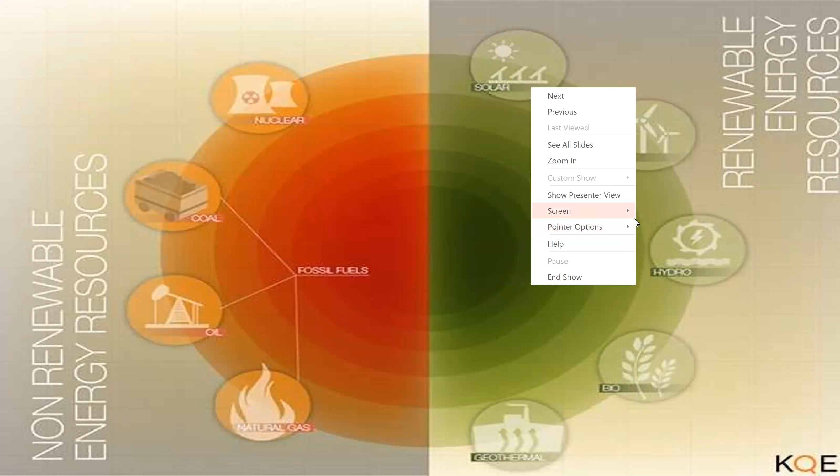We have hydropower, energy generated out of water. We have geothermal, energy generated from the heat available under the land. Or we have biomass, energy generated out of animal manure or rotten crops, etc. These resources are going to be available forever and are not going to end at any point—they are called renewable resources.

So this is a definition available for both; this is a primary definition. All those resources available in unlimited quantity, that is, they will not run out, are known as renewable—they may include water, sunlight, air, etc. All those resources which are limited and continuous usage will end them are known as non-renewable—they may include coal, oil, gas, nuclear power, etc.

Here in this chapter of your book, we are going to study about both resources—that is, how energy is generated out of the renewable resources, and also how energy is generated out of the non-renewable resources. So first of all, we are going to talk about the non-renewable resources.

One of the best non-renewable resources for energy generation is coal. The question arises how the quality of coal is identified. The quality of coal is identified with the help of carbon content available in it—the higher the carbon content, the better the quality of coal. Coal is a fossil fuel formed due to the decomposition of natural vegetation under the land. If we dig the mountains and other areas, we usually find coal.

So on the basis of carbon content, coal is of four types. If you refer to page 133 of your book, on the right hand side of the page there is a chart available on the types of coal, wherein four types of coal have been mentioned: anthracite, bituminous, lignite, and peat.

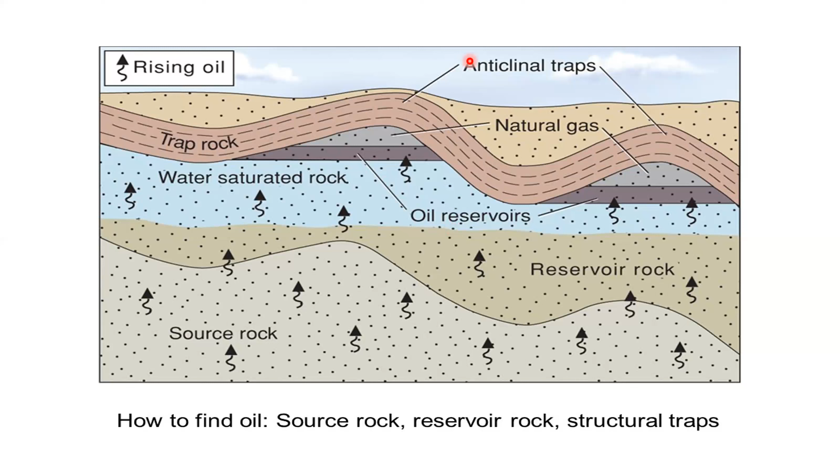This figure 8.15 is important. So if we talk about oil, these are the areas in Potwar Plateau where it is found, which are Dharnal, Joya Mir, Adhi. In Lower Sindh, it is found in Mazari, Khaskheli, Tando Adam. In the Potwar, there is the Attock Oil Refinery. In Karachi, there is National and Pak Arab Oil Refineries.

We talk about the modes of extraction. You just need to remember the names: oil is extracted through drilling, dripping, or pumping. You don't need to remember the procedure, just the names are important. Also, the products of oil are used in manufacturing paraffin wax, plastics, synthetic rubbers - any four, if you remember, is enough.

Oil can be used as a source of electricity. How is electricity generated out of oil? It is generated in a similar manner to the one I told you for gas as well. If you want, you can write it down: the water is heated through oil, coal, or natural gas.

The water is heated through oil, coal, or natural gas, which generates steam, and the steam is used to run the turbine, attached to which is a generator.

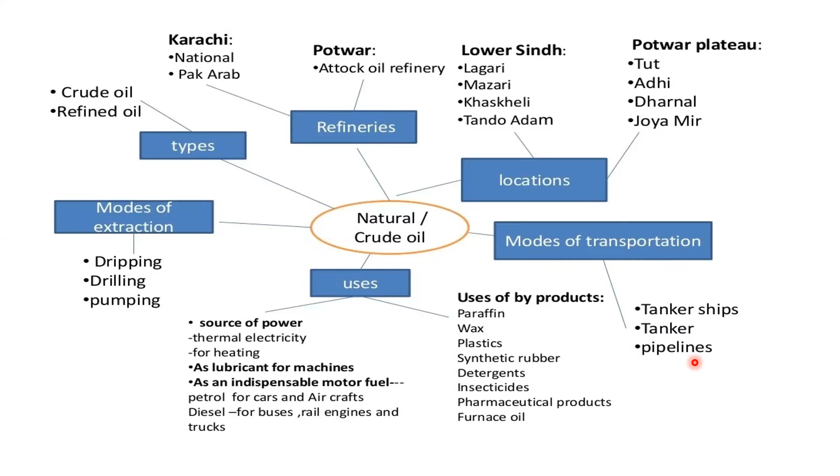Apart from oil, there is another fuel called natural gas. Natural gas is a cheap fuel, and the reason for it being cheap is that its power output capacity is quite low. The best power output capacity is of coal, the second best is of oil, and the third best is of natural gas.

Natural gas is found just above oil, and it was first discovered in Pakistan in 1952 at Sui, Balochistan, by a company called Pakistan Petroleum Limited. While they were drilling in search of oil, natural gas was discovered.

This gas field is considered one of the largest in the world. From this gas field, natural gas is supplied all across Pakistan. A pipeline network has been set up towards Karachi and Sindh areas, and also towards Punjab areas.

So soon after its discovery, a pipeline to Karachi was completed to provide cheap fuel. Another pipeline to Multan, Lahore, and Faisalabad was also completed in the 1960s. Natural gas is used to generate electricity, and as a fuel in motor vehicles, machineries, and other stuff as well.

But nowadays natural gas is in short supply and is not easily available everywhere in Pakistan. If we talk about the areas, natural gas was primarily found in Balochistan, in Sui, in Pirkoh.

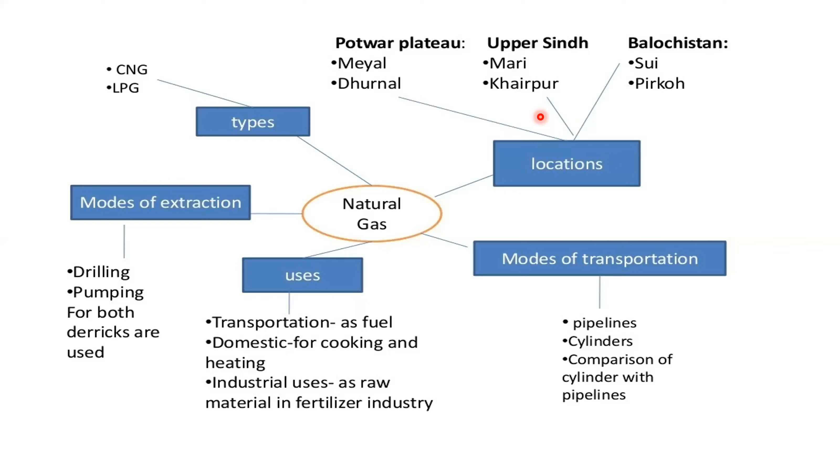Moving on further, the next thing that we have is nuclear power.

Nuclear energy is the energy released out of uranium or nuclear atoms, generated as a result of atomic fission. Atomic fission is a process when atoms are split into smaller atoms. This process usually takes place in a nuclear power station, and the energy generated is called nuclear energy. Across the world, the best power output available is that of nuclear energy.

Across the world, the best power output available is of nuclear energy. No other resource, neither coal, oil, nor gas, is capable of matching the power output capacity of nuclear energy. It is said that if you burn 1 ounce of nuclear fuel, the energy generated is equivalent to burning 1 million tons of coal.

So nuclear energy in any sense is not comparable to coal, oil, or gas. This is why I did not include it in the ranking while ranking coal, oil, and gas, because it is not comparable.

Nuclear energy is used to heat water, which makes steam, which turns the turbine to make electricity. Modern countries nowadays use nuclear power plants to generate energy on a large scale. But one of the major drawbacks of nuclear energy is that it is hazardous to human health.

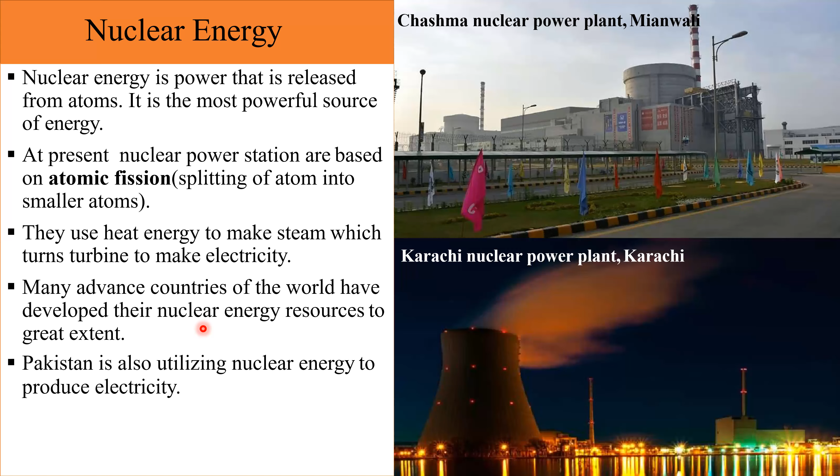If you have heard about Japan, during World War II, America dropped a nuclear bomb on one area of Japan, Hiroshima. Due to the nuclear bomb being dropped in that area, much of the population was destroyed. Even today, children born there are not able to walk properly, or are usually considered not normal. So this is an issue caused by nuclear power, that nuclear energy has harmful effects on the environment if left undisposed.

Uranium is the fuel widely used to produce nuclear energy, and nuclear power is also non-renewable, meaning once the uranium has been used, it cannot be used again to produce nuclear energy.

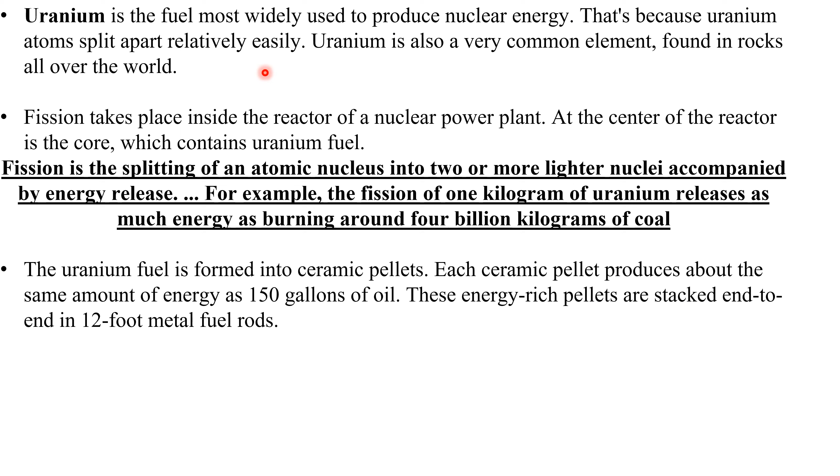The reserves of uranium are getting few in number due to continuous usage. This is why nuclear energy is also considered a non-renewable source of energy in some sense.

A question can come in the exam about the advantages and disadvantages of nuclear power. Nuclear power does not produce any pollution and does not contribute to global warming. The fuel cost of nuclear power is very low. Another advantage is that it is not going to explode immediately, just like if you burn coal, natural gas, or oil, they are going to explode immediately. However, nuclear power takes a lot of time in exploding, so from that point, you can say nuclear power is safe up to some extent.

However, there are various disadvantages of nuclear power. It is radioactive, and safe disposal is difficult and expensive. Large scale accidents can be catastrophic, and the public perception of nuclear power is negative. The cost of building and safely decommissioning nuclear power plants can be very high, and it cannot react quickly to changes in electricity demand. These are some of the issues observed with nuclear power.

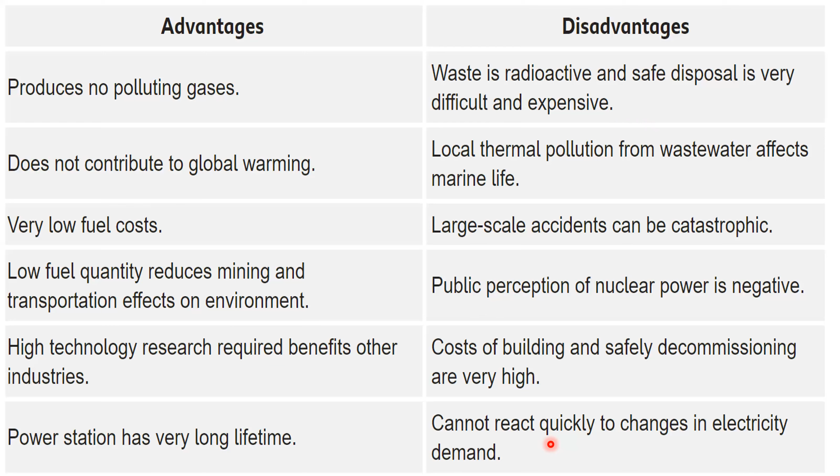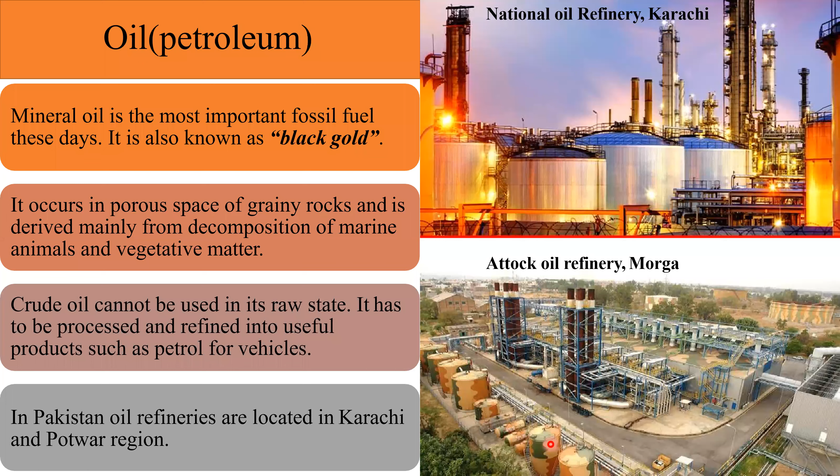A question can come in the exam asking for 6 marks about the advantages and disadvantages of nuclear power, so you are required to write them down accordingly. This is a brief description about nuclear power and other non-renewable resources.

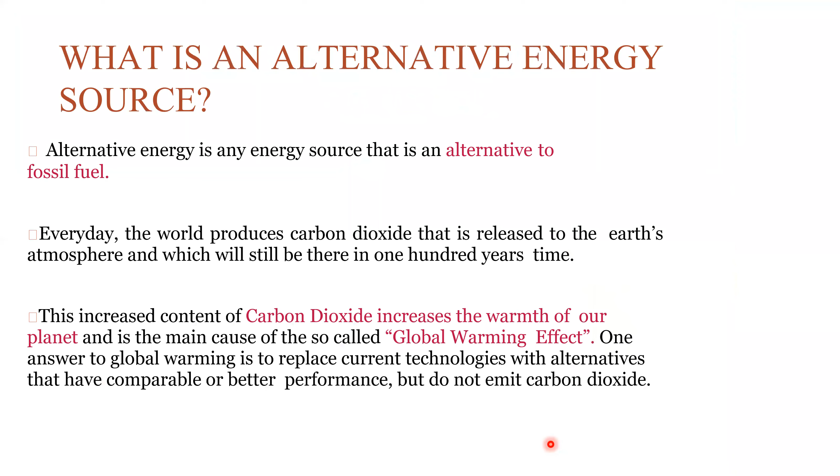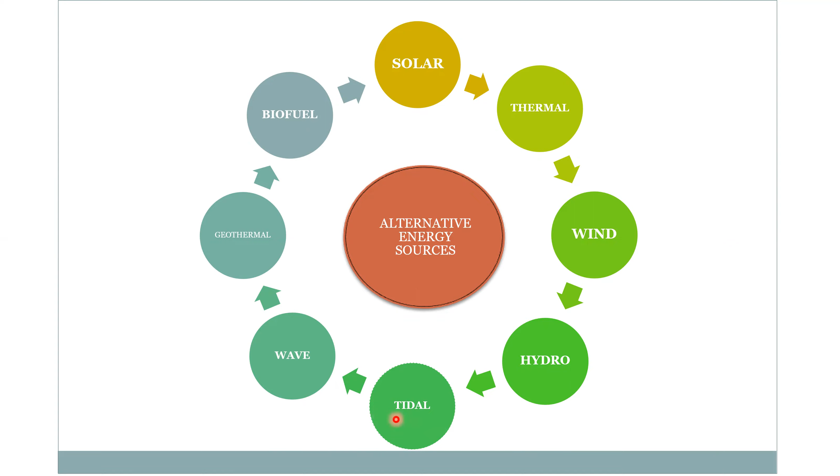Moving on, the next thing in this chapter is about alternative energy sources. Alternative energy sources mean the renewable energy sources which are going to be available forever and are not going to end any day. We have the option of solar, wind power, hydropower, geothermal, biofuel, and then there is wave power done through the sea, or tidal power done in the rivers. We are going to discuss all these things.

Primarily, the first thing we need to discuss is solar power. Solar power is the energy of sunlight used by solar cells, and it is used to generate energy on a large scale.

In the solar panels, there are certain photovoltaic cells which convert the sunlight's heat energy into electricity. However, the power output capacity of solar energy is not very high, and you need to install a lot of solar panels in order to generate electricity on a large scale. For example, in the picture, this is an area in Bahawalpur, Punjab, where so many solar panels are installed just to generate energy up to some extent.

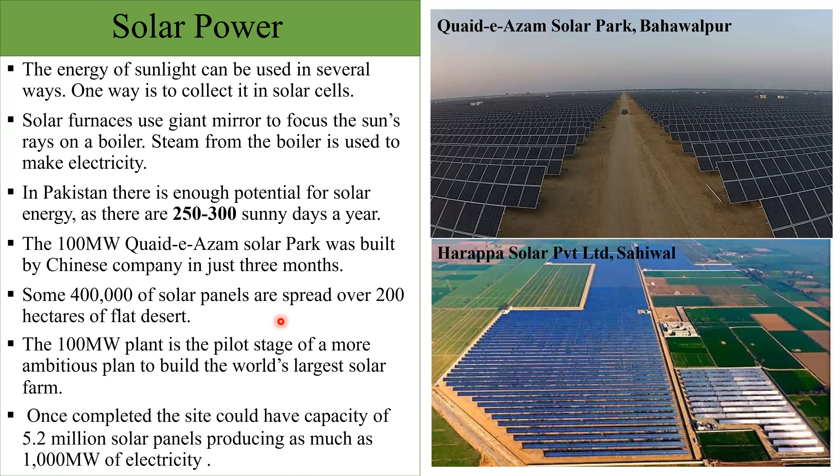For solar energy, if we talk about the advantages, solar power does not generate any water pollution or air pollution. Solar energy can be efficiently used for heating and lighting, and if there is a battery system installed along with the solar panels, the solar energy can be stored for later use as well. These are some of the advantages of solar power.

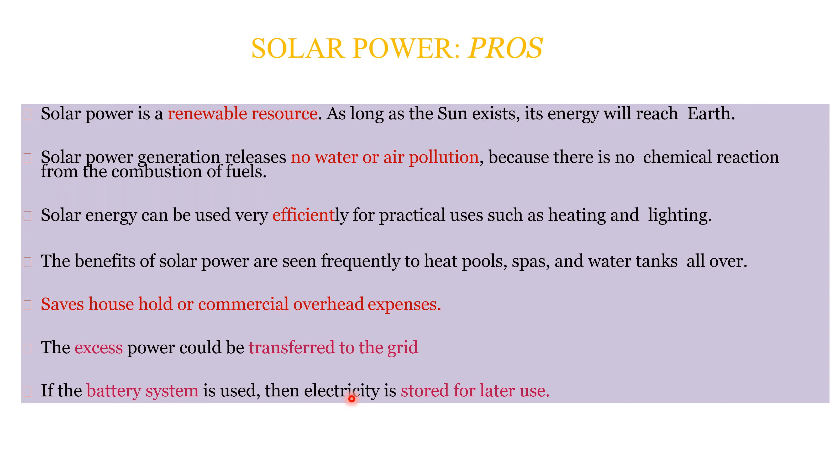However, there are some disadvantages associated with solar power as well. Solar power does not produce energy if the sun is not shining. In areas where sunlight is not available at all times, you cannot generate solar power. Solar power stations can be very expensive to build, so it is going to be capital intensive. Solar energy is renewable, but it can only be reaped during the daytime.

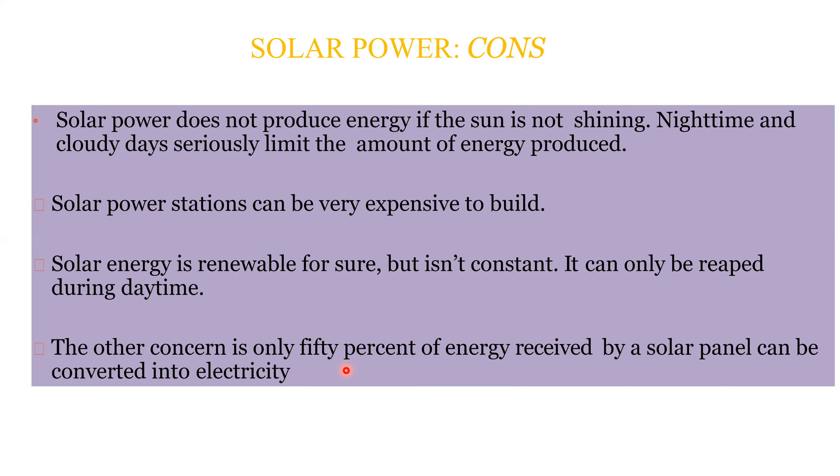Another major disadvantage is that only about 50% of the sun's energy is converted into electricity, and the rest 50% is wasted. So we can say that these solar panels waste a lot of sun energy while converting the sunlight into electricity. That is also one disadvantage.

Talking about wind power, that is another source of generating electricity and is a renewable source. Wind power is used for many purposes like sailing, kite flying, etc.

Wind power is usually installed in rural areas, that is in villages. Wind power requires an open area where wind is easily available, so usually wind turbines are installed near coastal areas.

A turbine has blades like fans, and along with these blades is installed a generator. Once the turbine moves, the generator generates electricity, which is then stored in the transformer and supplied to where it is required.

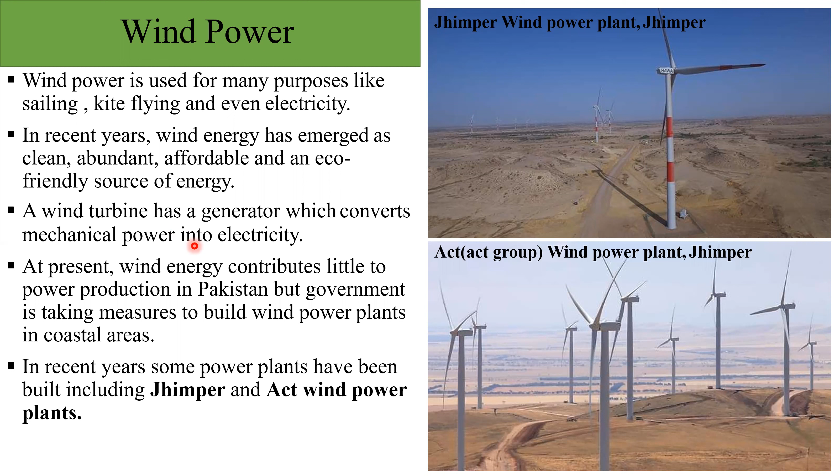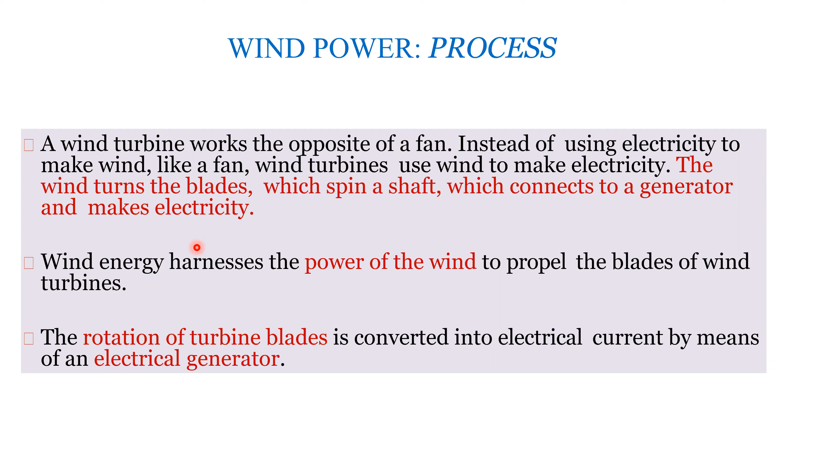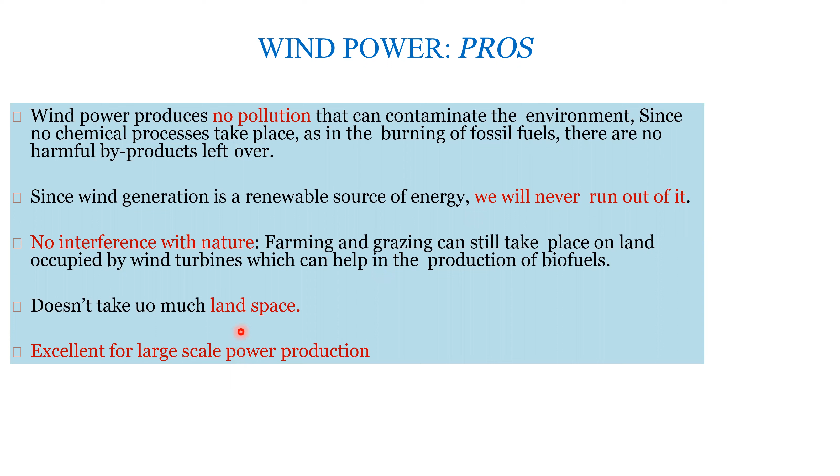In areas where wind is available, you can easily generate electricity from the wind. It does not require a lot of space, and it is excellent for power production.

However, there are some negative sides of wind power as well, such as it destroys the scenic beauty. If you install large windmills in an area, it will destroy the scenic beauty. It can kill birds as well, and it can be expensive to build.

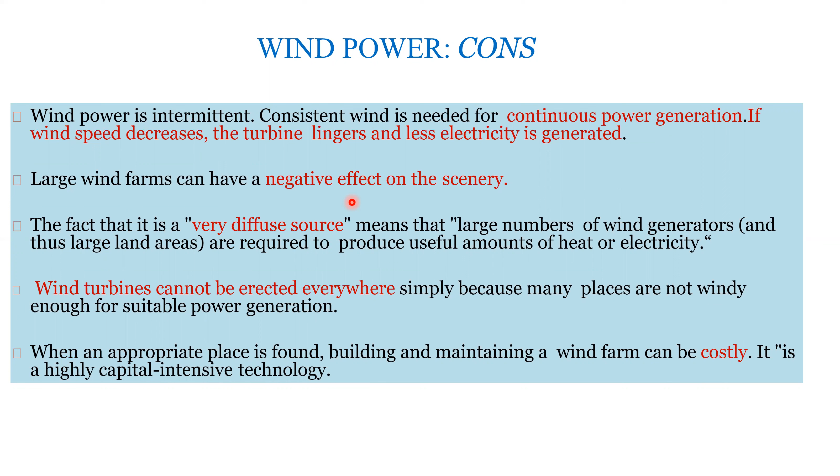It can be costly, and it cannot generate energy on a large scale. It cannot be installed in areas where wind is not frequently available. So these are some of the disadvantages of wind energy.

Moving on, the next thing we have is hydroelectricity. Hydroelectricity is the conversion of water into hydroelectric power. The water from dams is used and made to fall on a running turbine with pressure, the turbine moves, and the generator generates electricity. That is called hydroelectricity.

Pakistan has three large dams. If you remember, we have studied them: Mangla Dam on the river Jhelum, Tarbela Dam on river Indus, and Warsak Dam on river Kabul in the northwest. These are the three large dams used to generate hydroelectricity.

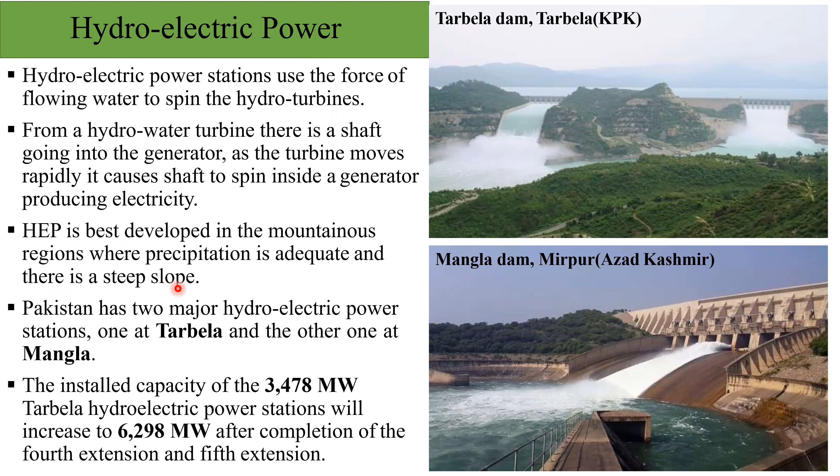Hydropower generation requires high altitude or a steep slope from where water can be made to fall with pressure. So it is best developed in mountainous regions, and this is why the northern areas of Pakistan are best for hydroelectricity generation. This is the process of a hydropower plant.

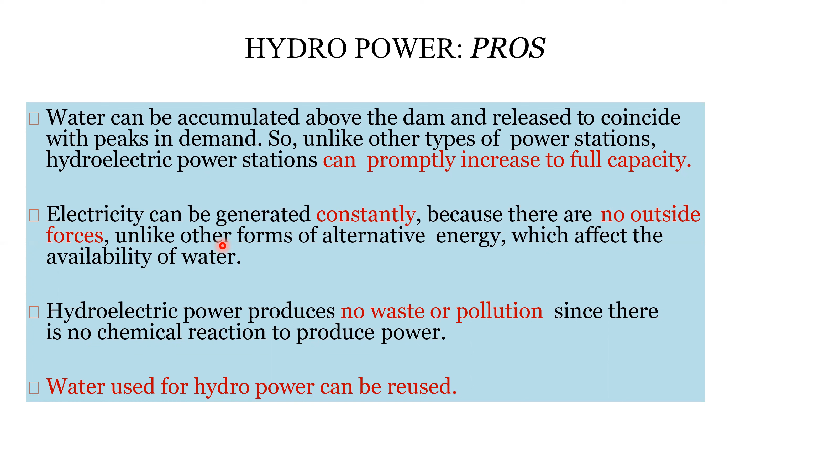If we talk about hydroelectricity, there are some advantages, such as energy being generated constantly, and if water is available, energy can be generated to full capacity very easily. There is no waste or pollution of any kind, and the outflow water, left over from producing hydroelectricity, can be reused again.

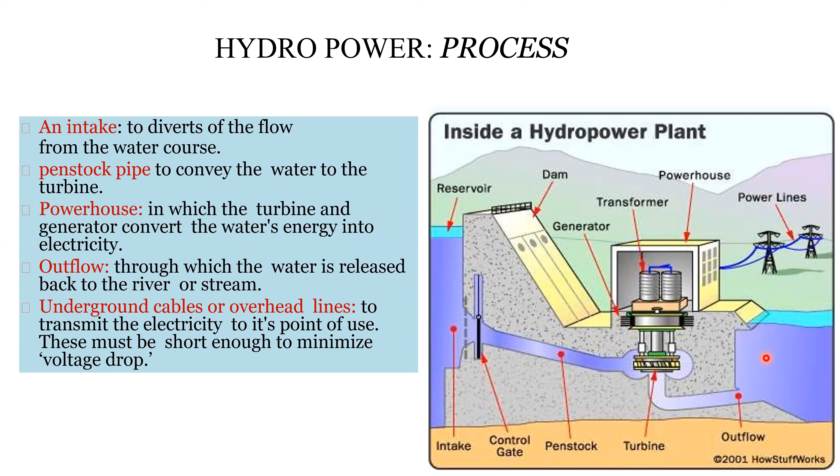Even there is no wastage of water, it can be used again. However, there are some disadvantages associated with hydroelectric power, such as dams can be very expensive to build, the maintenance cost can be very high, and there needs to be a sufficient and powerful enough supply of water in the area to produce energy. These are some of the things important to remember.

Okay, got it. Any confusions?